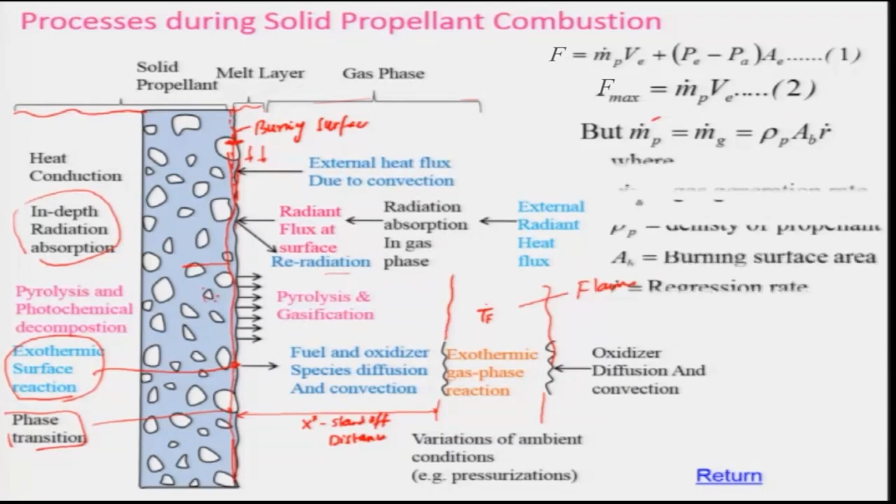And why is it important? Because we need to determine the thrust. For that we have seen this equation: thrust is equal to m dot p v e plus (p e minus p a) A e. If I say it is fully expanded, the maximum thrust I can get, v is the velocity and this is the mass flow rate of the propellant passing through the nozzle. If it is operated under the steady state, the mass flow rate of the propellant consumed is equal to the mass flow rate of the gas passing through the nozzle, which is equal to rho p, the density of the propellant, times A b, the burning surface area, times R dot, the regression rate.

So, therefore, if I know this R dot, and of course the density of propellant will be known for a particular composition, and A b, the surface area, I can find out the propellant mass flow rate, and then if I know V, I can get the thrust. Or the other way around, if I want a thrust, then I need this propellant mass flow, and you can calculate from the design case. Of course, V e will depend on the area ratio used in the nozzle, and on the chamber pressure. So, based on that we can find it out. Therefore, it is very important to determine the regression rate.

Of course, the process involved during the combustion of the solid propellant is quite complex, and we may not be in a position to model this. However, we will be using experimental data, and also we will be using some very simple analysis to calculate the regression rate.

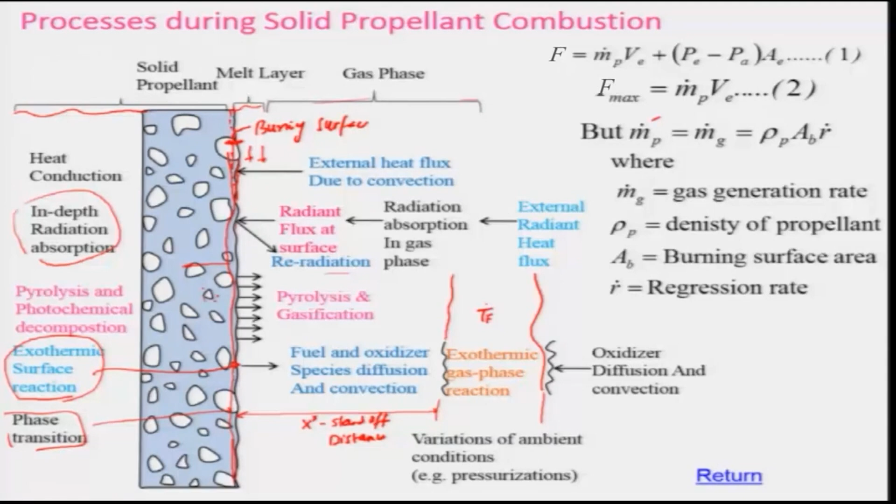Whatever we have discussed till now is basically general processes during a generic solid propellant combustion, but it may differ in the case of a solid propellant rocket engine. Let us look at the propellant burning mechanism and flame structure for a double base propellant. So, let us look at a typical flame photograph of a nitrocellulose nitroglycerin double base propellant.

Question arises, under what condition is this happening, and even if it is happening, what will happen to the burn rate? That means, if I consider case A, whether the burn rate will be higher or lower as compared to case C.

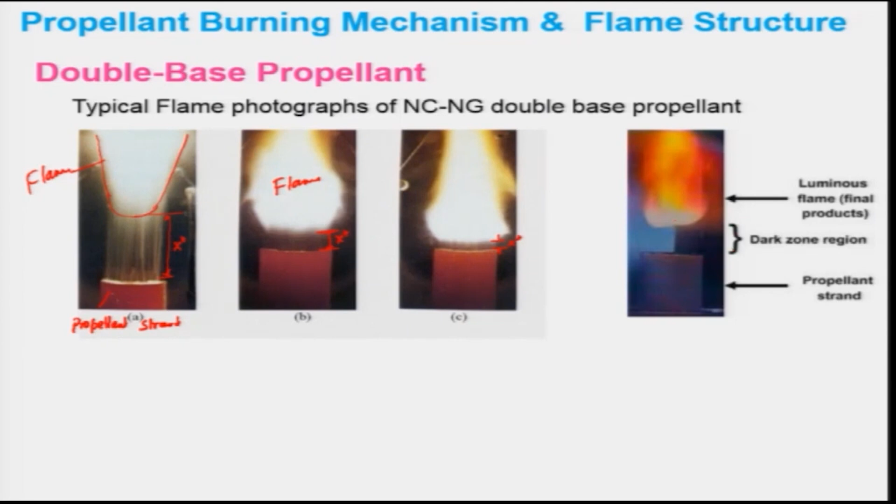So, just to define this further, let me look at another diagram where it is very well illustrated, that is the luminous flame. This is the final product, and this is known as the dark zone, or you can call it basically lifted; the flame is lifted, it is not attached. And this of course is the propellant strand, and we can call this region a standoff distance. This is the standoff distance.

So, let us look at the data for all these 3 cases, case A, case B and case C. In figure A, that corresponds to 1 megapascal chamber pressure. This is basically PC, chamber pressure is 10 atmosphere, case B is 20 atmosphere, and case C is 30 atmosphere. The regression rate is increasing from 2.2 millimeter per second to 4 millimeter per second.

You can see that the regression rate is quite low as compared to the burning velocity even under atmospheric conditions of a simple mixture like methane air. As compared to that, it is very low, although it is at a little higher pressure, which is expected to have a low regression rate, and so also the low burning velocity. And now question arises, why is it so?

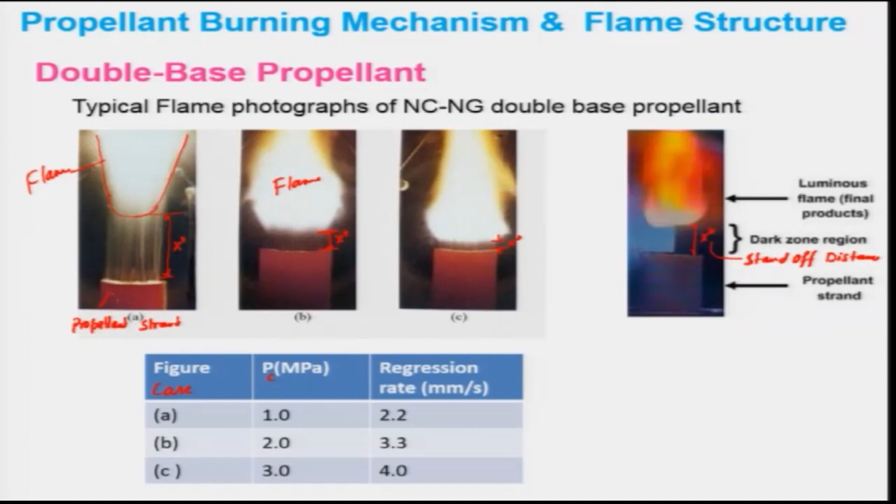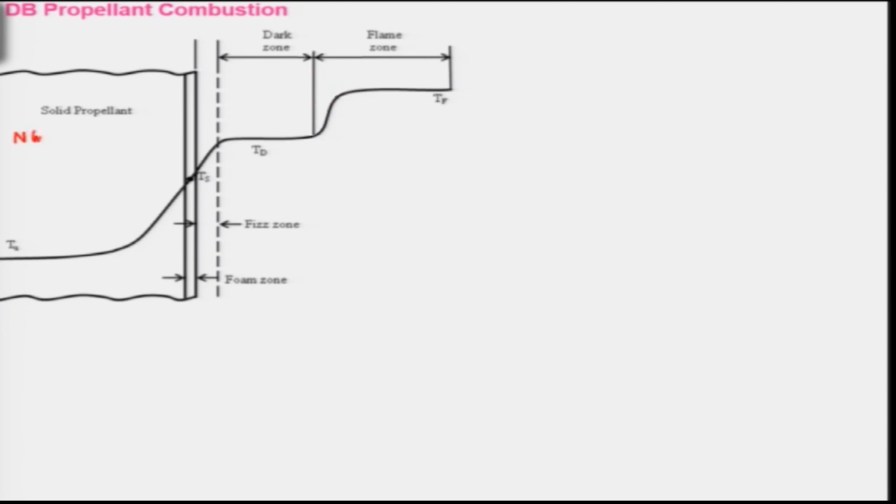So, let us look at double base propellant combustion. Consider that this is basically a solid propellant, which I have shown in this portion, and this will be containing nitroglycerin, C3H5(NO3)3, and this will be containing nitrocellulose, C6H7O2(OH)3-x(NO3)x, and this is basically a polymer, and plus there will be additives.

Now, you can see the temperature profile during a typical combustion of double base propellant. This is your unburnt temperature of the virgin propellant, and then it goes on increasing to a level where no reaction will be taking place, and after that it will be at the surface temperature, then it also increases to TD, and then it remains constant for a certain zone, and then there will be the flame zone.

If you look at this combustion process, looking at this temperature profile, it can be divided into basically 5 zones. In this zone, you can say that there is conduction taking place, this portion. This is your heat conduction zone, and this zone is known as the foam zone, and this zone is known as the fizz zone, and this is known as the dark zone, and this portion is the flame zone.

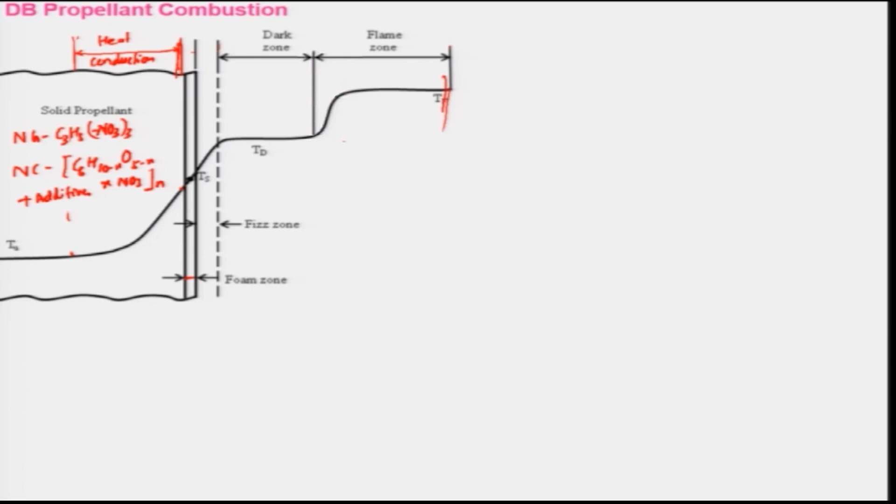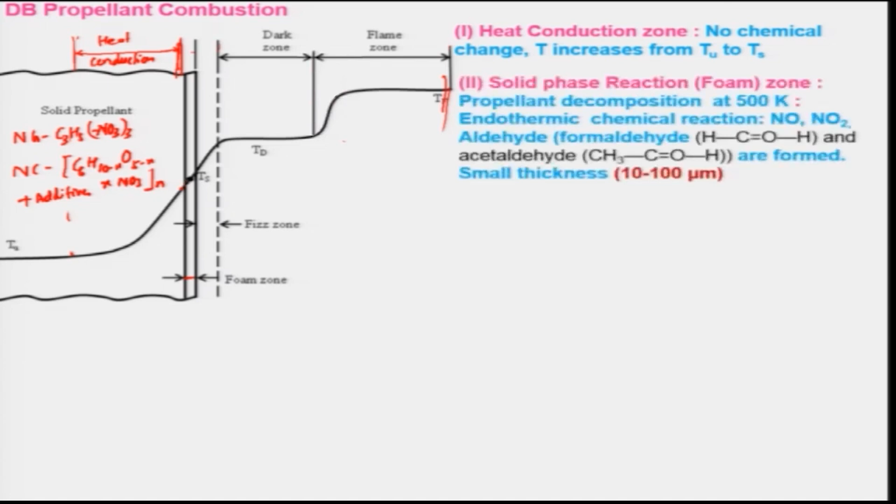So, let us look at various zones. In the heat conduction zone, as I told, no chemical reaction occurs. As a result, there will not be any heat released. However, the heat will be conducted towards the unburnt virgin propellants, and as a result the temperature will increase from Tu to Ts, the surface temperature. Then the solid phase reaction zone, which we call the foam zone, is where the propellant decomposition will be occurring.

That means, if I consider this as R-ONO2, sorry, this is R-O-NO2, which is nothing but the NO3 I have written here, it will be converted in this zone to NO2 and RCHO. This is corresponding to this zone.

So, in this zone propellant decomposition will be occurring at around 500 Kelvin, an overall endothermic chemical reaction will be taking place, and NO, NO2 and aldehydes, acetaldehydes, are formed. The thickness of this foam zone is something around 10 to 100 micrometers.

And this is a very important zone because it is being decomposed and then released. Then this is known as the fizz zone, because some bubbles will be formed here and ejected out, creating some fizz. Foam means there will be some bubbles, sometimes melting zones too, creating some kind of foam. We will see some figure maybe for composite propellant, I will show you.

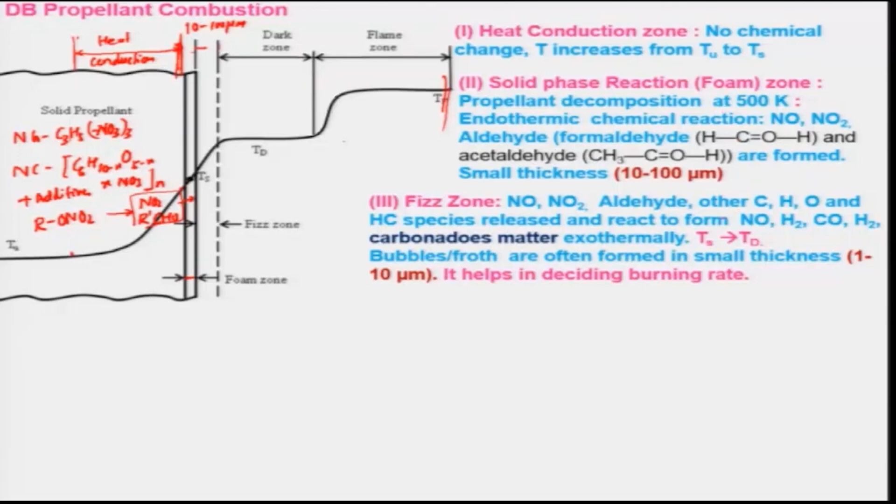In this fizz zone, the NO, NO2 and aldehydes formed in the foam zone, and other CHO and unburnt hydrocarbon species, are released and react exothermically to form NO, hydrogen, carbon monoxide and also carbonaceous matter, such that the temperature increases from Ts to Td. During this process bubbles and froth are often formed in a small thickness, around 1 to 10 micron. And this thickness of the fizz zone decides the burning rate.

Let us look at the dark zone. In this zone NO, hydrogen, carbon monoxide and carbonaceous matter will be reacting, and N2, NO, water, carbon monoxide and carbon dioxide will be formed. This zone is quite large compared to other zones, something 1 to 20 mm, depending on the reactions going on and also on the pressure. A lot of research has been done, but it is not very clear what the reactions are, but some reactions which are important in the dark zone are:

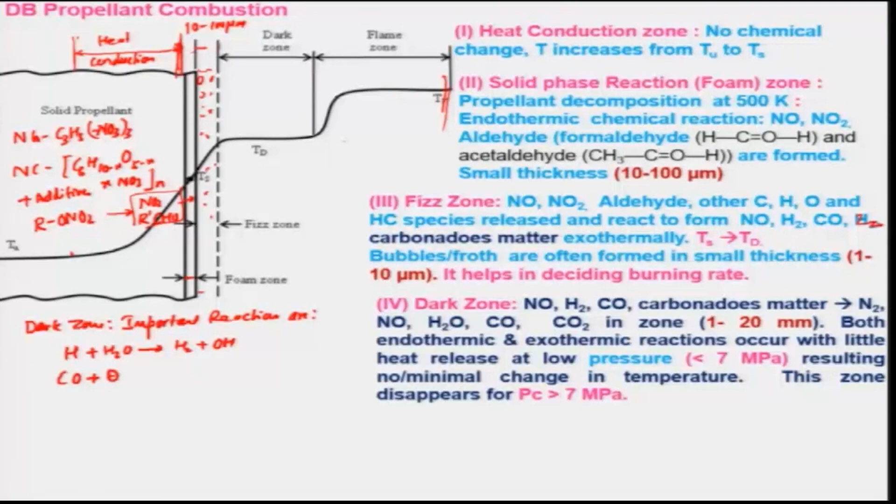H reacting with water going to hydrogen and OH, carbon monoxide reacting with OH into carbon dioxide and H radical, and 2NO reacting with hydrogen giving 2HNO, and this 2HNO reacting with hydrogen going to water plus N2, which is quite a fast reaction. I can call these reactions 1, 2, 3 and 4. Reaction 3 is basically a third order reaction.

So, therefore, the overall reaction will be between second order and third order. Keep in mind that this reaction gives a little amount of heat; both exothermic and endothermic reactions take place with little or no change in temperature, because the heat release is almost negligibly small. This is a very important zone, particularly when the chamber pressure is less than 7 megapascal. But if it is greater than 7 megapascals, this zone becomes zero, and the flame zone comes very close to the fizz zone.